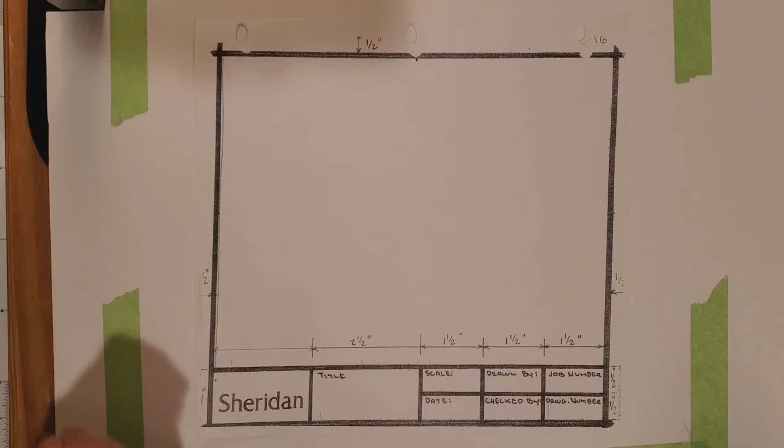Today I'm going to show you how to do this title block. This is a rough copy of it, but I'm going to walk through the proper way to do this title block. So the first thing you need to do is just get a sheet of paper. Regular printer paper is fine.

And what I would recommend is that you actually tape the paper down in the corners, just on the edges of the corners like that. And what you can do is tape them down. And try to make it as square as you can. There we go. So we have our sheet of paper.

So the first thing we want to do is we're going to make a border 1/2 inch from the edge of the paper in. Using your architect scale, you're going to find a 1/2 inch. And you're just going to simply hold this part to the edge of the paper and mark the paper a 1/2 inch in. And because we don't have T-squares, we're just going to do 2 marks on each side of the page, 1/2 inch in.

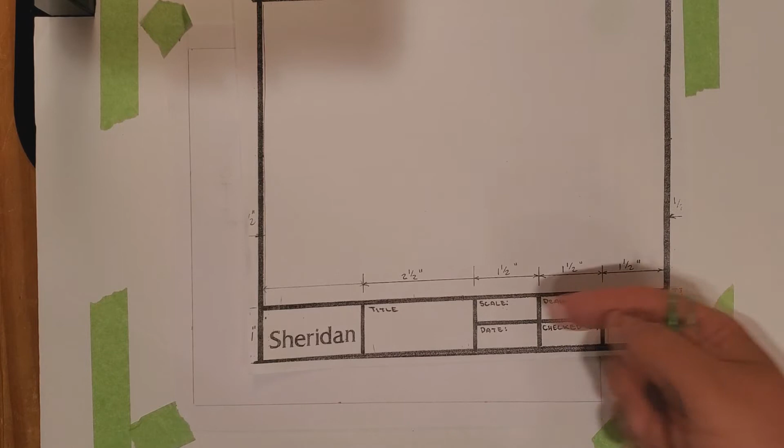So we know the title block is 1 inch high and 9.5 inches wide. So what I would do is use the 1 inch scale, and you just have to go across and find 9. There's 10, so there's half. 9.5 inches right there. So you put the 9.5 inch mark down here in the corner of your title block and mark the 0.

Okay. Then you're going to mark 1 inch up the side, which is all these divisions right here. And we can mark it here again. Okay. So we're going to come across. Get everything lined up nice and neat. And you're just going to go right across. And here you're going to go straight up. So there you go. So there we have the beginning of the title block.

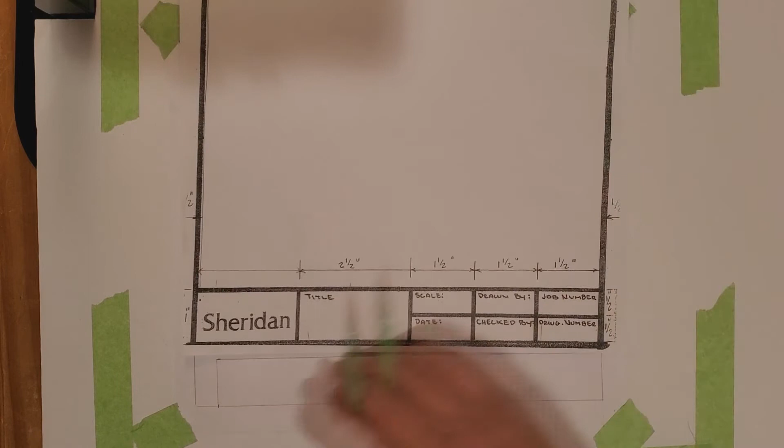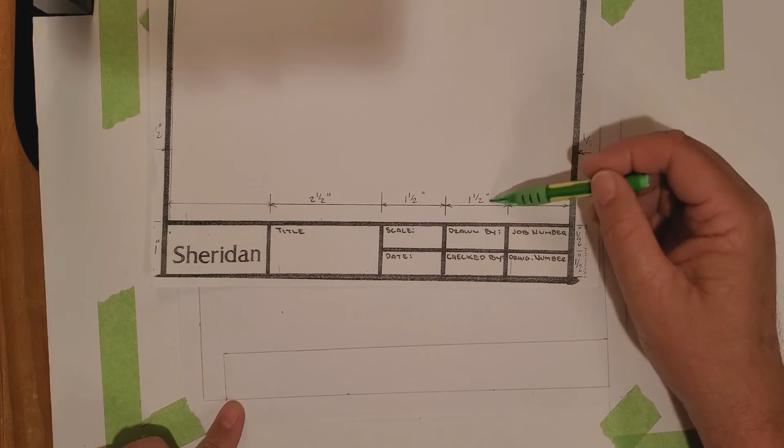Now this looks bigger on this copy because we've used a marker to show it. So it's a lot wider. But when you see it in pencil, the title block doesn't quite go to the end. So let's fill this in. We know these are an inch and a half each window. So we have 3 of them, so we know we're at 4.5 inches.

So what we'll do, again, we can use our 1-inch scale on here. If I can just find it, there it is. And we'll go to 4.5. 1, 2, 3, 4. There's 5. There's half. So we're just going to make a mark down here at 4.5. Put the 4.5 in the corner here. Mark it at the 0. Oops. There you go. And run a line straight up. That'll give us this box here.

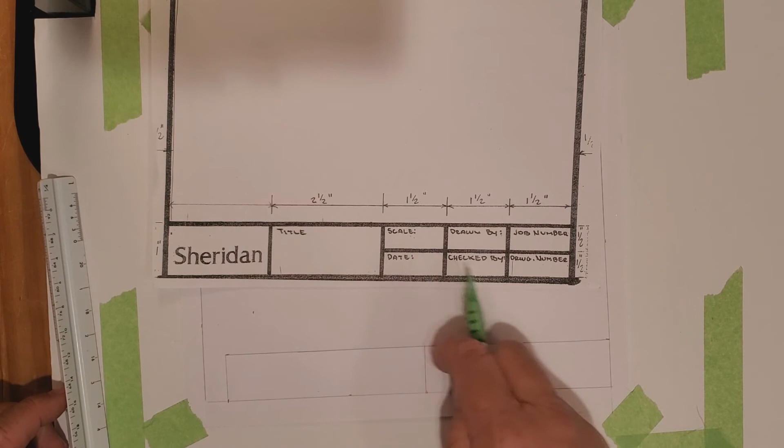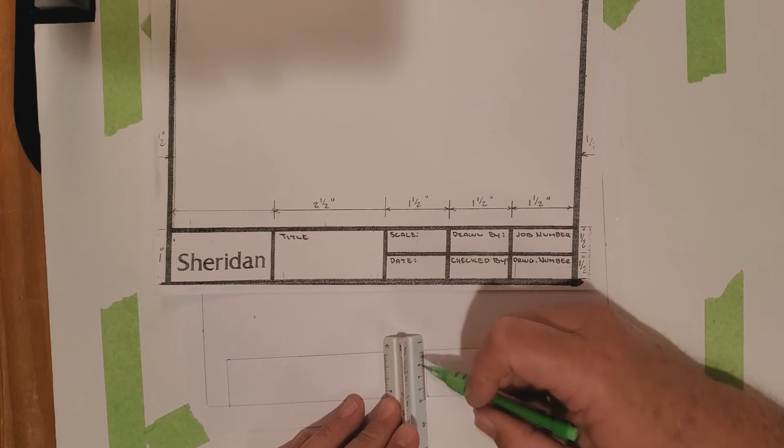So now we have to put a line across halfway, which is 1/2 inch. So let's use the 1-inch scale again. And we're just going to go right there. That's halfway. So if we make a mark, put the 1-inch scale down like that, and just make a mark right there. I'm going to run that straight across the page. So now we've separated the upper and lower.

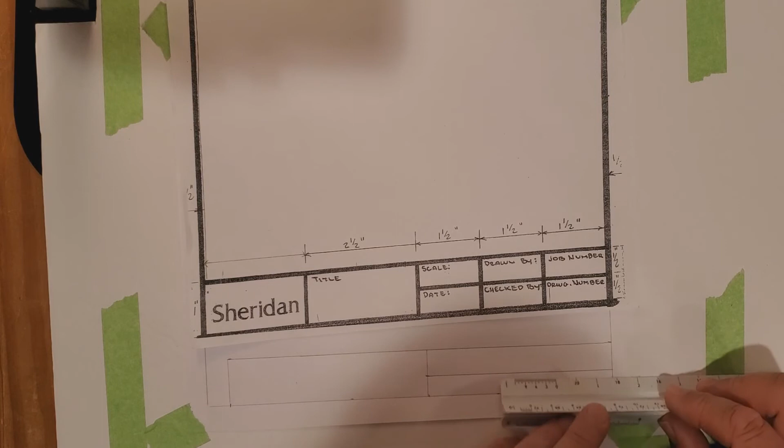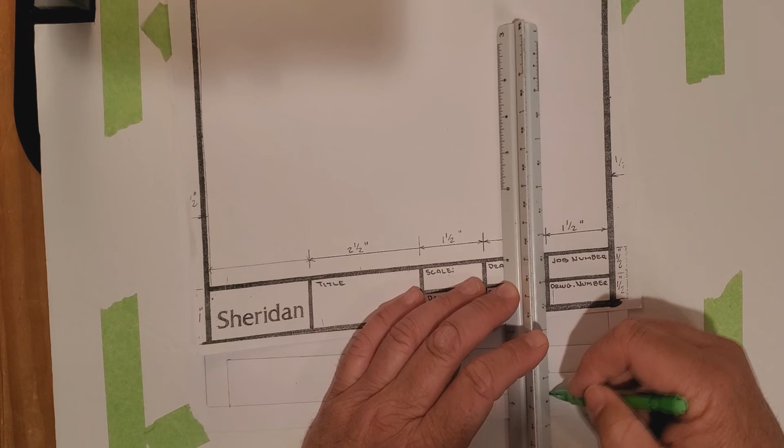Now, these here are 1.5 inches off the side. So there is 1.5 inches. Oops. And there's 1.5 inches. So we run this straight up. Like that.

Okay, so these should all be 1/2 inch. Looks like I'm out a little bit on the top one here, just by a fraction. Okay, let's fix this up. So if you do make mistakes, you have to use a pencil, do everything nice and light, and they're easy to fix up. So just a little bit.

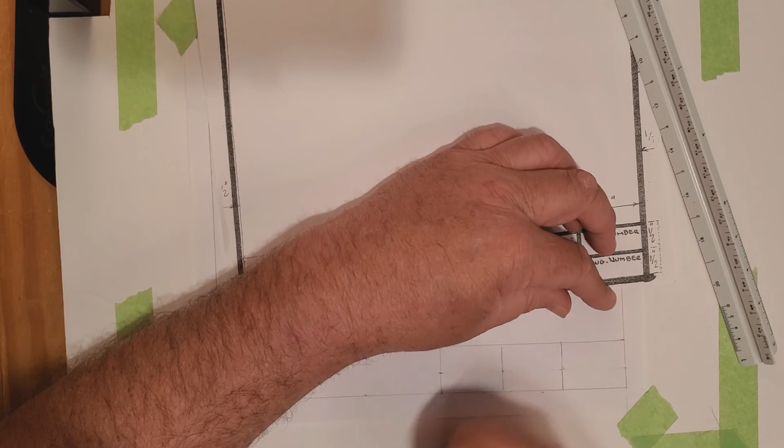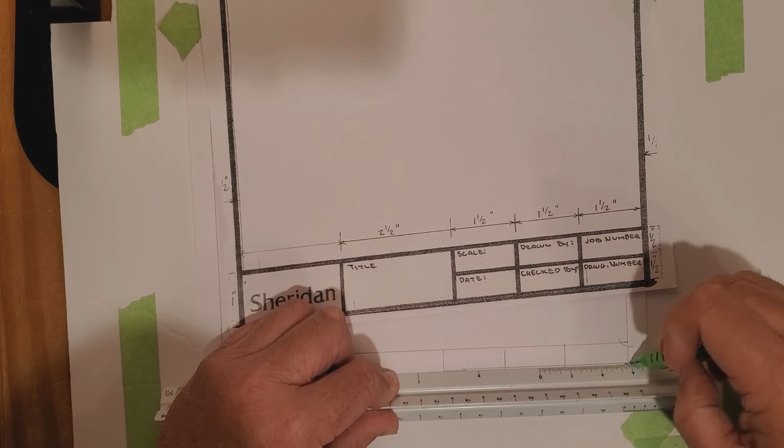So 1/2 inch. 1/2 inch, just a bit higher. So let's run this across and see if it looks a little bit better for us. All right. Okay, so

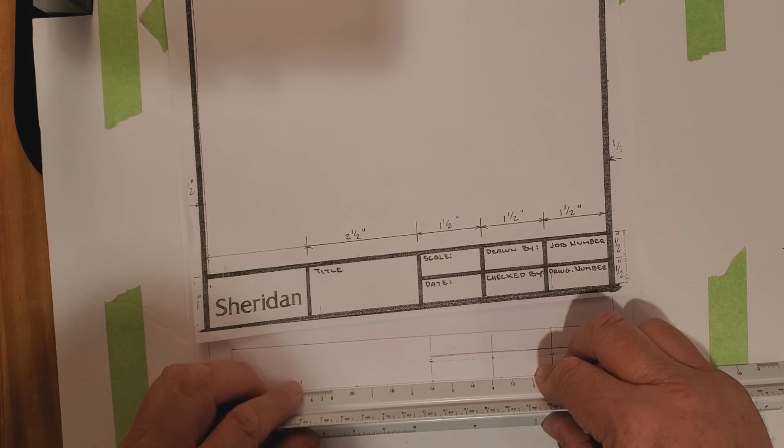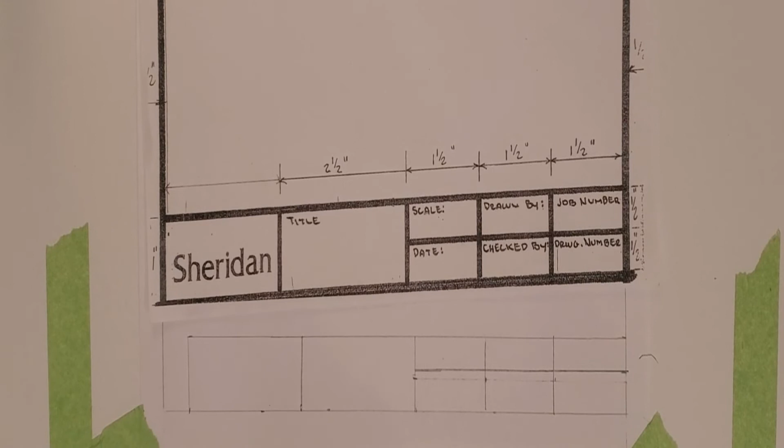once we get that done, we're going to do the next 2 boxes, which are 2.5 inches. So there's 2.5. All we have to do is mark the 0. Go straight up. And with that, we have all the windows complete. So the next step in all of this is just simply filling in all the required information. The first box, we know we have to write Sheridan. So you would simply write in Sheridan, nice and neat, best that you can.

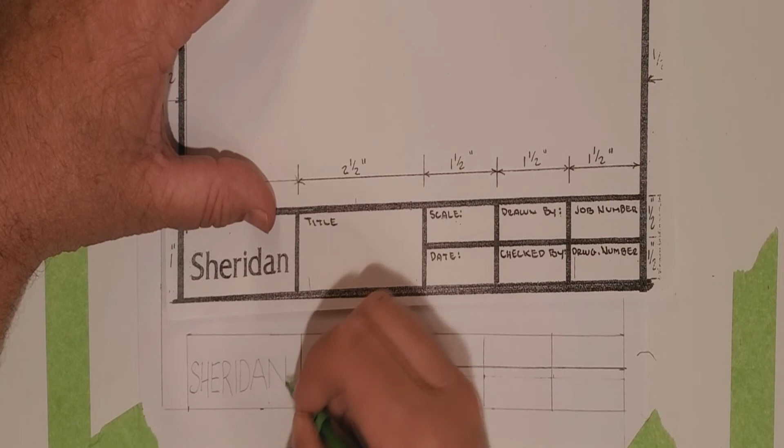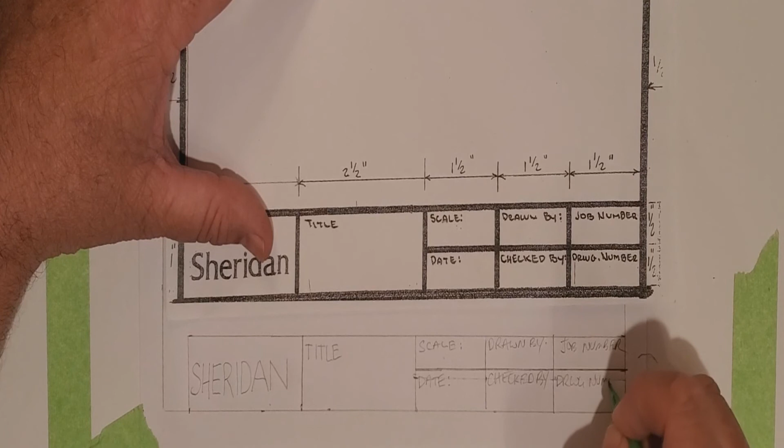Again, always using capital letters. Then you're going to write title up here. You're going to write the scale here. The date. Drawn by. Checked by. Job number. And drawing number. So you try and do it as neat as you can, capital letters on everything.

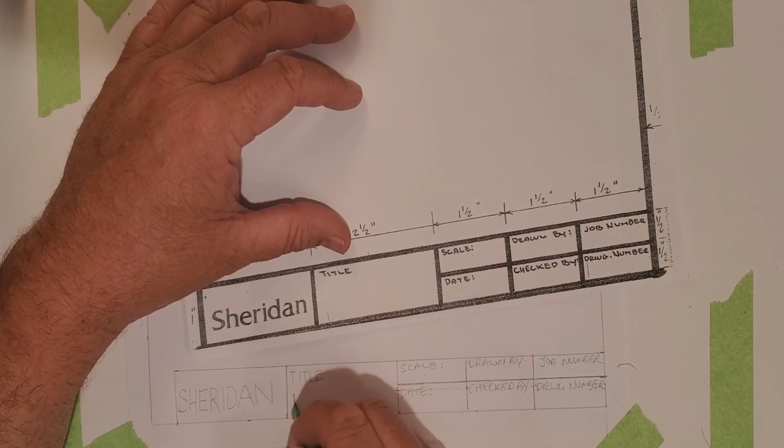So for a lot of the information in this box, you're going to need the information from me to put in the title block. So we could call the first title B-1 drawing. And I would give you this information. The scale would be 1/4 inch equals 1 foot 0 inches. You could put down the date as May 30th,

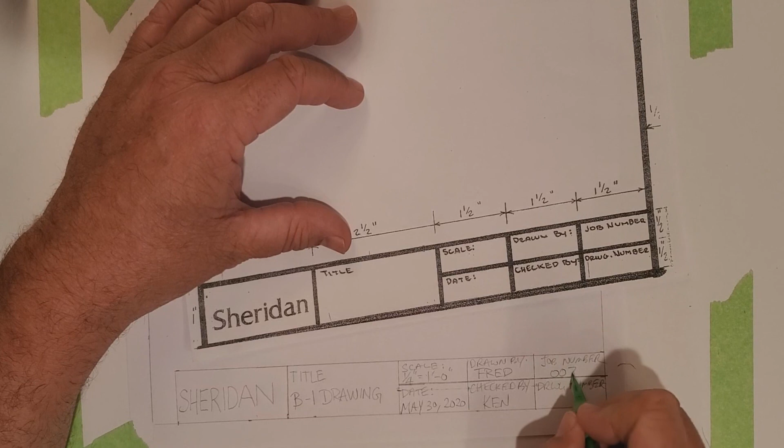2020. Drawn by, oh, I don't know, let's say Fred. Drawn by Fred. Checked by Ken. The job number could be, let's say 007, and it's drawing number 1. That's all you have to do. So when it comes to doing title blocks, it's some basic information. This is what we're looking for at Sheridan in the plumbing department.

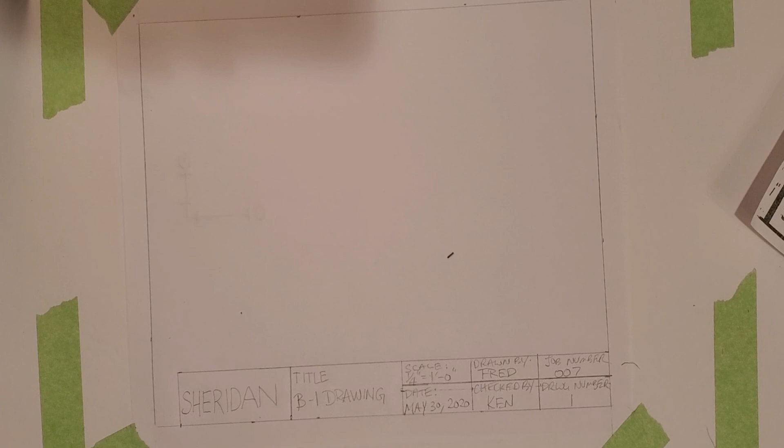And then what you would do, you would put your drawing in the middle of the piece of paper. So whether it's a B-1 or an isometric or whatever it is you're given, all you have to do is just put the drawing in there and you're done.